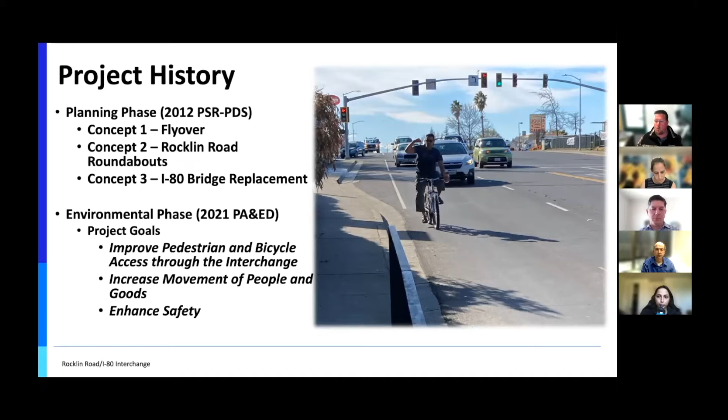And lastly, we want to enhance safety. As I briefly mentioned, for bicycle and pedestrians right now, your real only option is that small sidewalk on the south side of the interchange. With this project, we're looking at some alternatives to provide a safer bicycle and pedestrian facility through the area. And with that, I will turn it over to Luke to kind of go in on where we're at and what the designs look like.

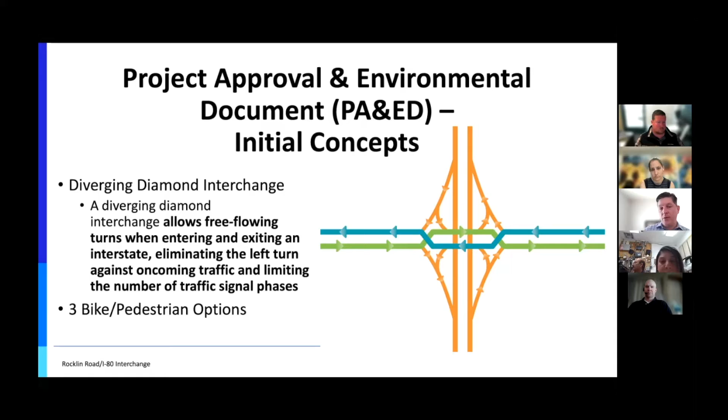Okay, thank you for that. And then you said we're still going to have 2 traffic lights. So I'm looking at this image and trying to figure out—maybe we can go to the next slide. Yeah, I'm just trying to figure out where the light still will be and how this will work. One more slide, actually. We'll come back to the video.

This is great, Sonia, this is what we wanted. So maybe one more slide, sorry. Can we go to the next one? Sorry, we've got quite a few things in here. A little preview—if we can go to alternative one, which I think is 2 more slides. Right here, there you go.

So we actually put a little traffic signal on here, Sonia, so it's easy to see. At the eastbound ramps, where the signal is today, we'll have another signal there—it's just that instead of people going through movements, they're crossing over. Same with the westbound ramps, we'll have a traffic signal there, and instead of going through, they cross over. You can see all the left and right turn movements are basically free, but in some cases they will be signal controlled.

And I can walk through this in more detail, Sonia. Are you good for that? I would love to see the details. I just want to make sure I'm understanding it properly.

Okay, so let's go back to the DDI video. Jacobs is actually working on a diverging diamond interchange in Alaska, and as part of that project they created an informational video. Now, this is a different interchange than we're proposing—it's just an example, and we're actually working on a video specific to Rocklin.

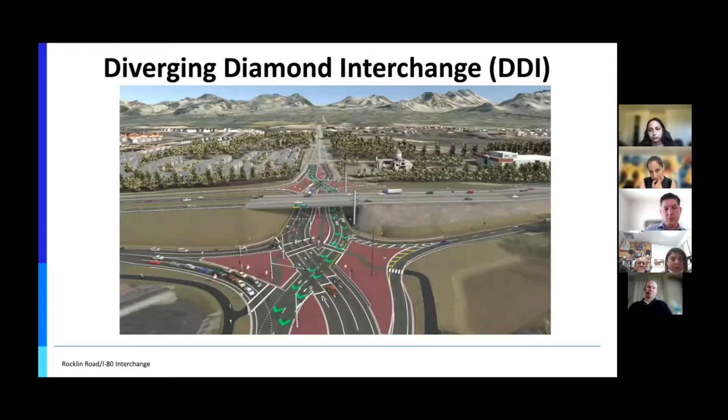Drivers report that DDIs are intuitive. Here's how they work. Drivers crossing the highway on O'Malley Road toward the mountains will go through a traffic signal, cross to the opposite side of the road under the bridge, and then cross back over again. Traffic traveling westbound on O'Malley Road toward Minnesota Drive will do the same. At the first signal, they cross to the opposite side of the road, go under the highway bridge, and cross back over again as they leave the DDI. Bicycles and pedestrians travel through the DDI in a protected central pathway. A major benefit of the DDI is that vehicles don't have to cross opposing traffic when entering or exiting the highway, which greatly reduces wait times at the interchange.

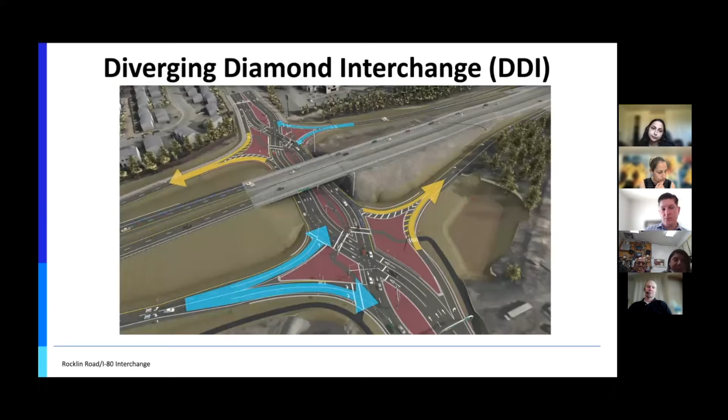So that's just a clip. It's a longer 5-minute video that talks about other interchanges, but that's just a 1-minute clip. You can see the roadway passes under the interstate, just like Rocklin Road does. What we plan to do is talk about the pedestrian and bicycle options specific to Rocklin Road, and we're working on creating a 1 or 2-minute video that we would show in April.

I don't know, Sonia or Roger or Ranveer, if that video helped you understand the DDI at all.

I understand the concept of it and how it's working. My question is, where are we putting those new lights and where is that crossing going to come on Rocklin Road, if that makes sense? Because I'm looking at my access for our business and I want to see where that's going to affect me.

Okay, Sonia, we're going to dive real deep. Mike's got about 6 slides that he's going to go through exactly how it affects your access. We're going to spend most of the meeting on 76 and the ARCO.

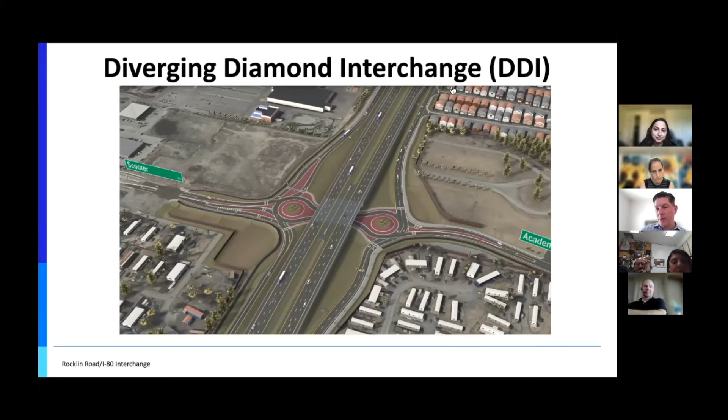Okay, so if we could go to the next slide. Ranveer, did that make sense? You're on mute. You're good? Okay, Roger, are you good?

Well, the only question I have is looking at this diamond construction, how much distance from the freeway the exits are. On this particular interchange at Rocklin, your businesses are almost right up against the freeway. My question is, how are you going to get the kind of spacing from the actual freeway interchange to be able to put in these exits and entrances? This looks like it would take almost twice the room that it looks like is there.

A good point, Roger. We're going to dive into that. We definitely are. The existing access at 76 and Arco is almost 0 feet from the off ramp to the on ramp in some cases, so that's what we're going to dive into. I hate to not answer your question right now, but if I could finish up my slides, then Mike's going to dive into this, and we have some specific exhibits. That's great. Thanks. Okay.

All right, let's get to the action, the main part of the show. So I'll get through these slides. I just wanted to say we really appreciate the stakeholders and the community. We had 46 people at the community meeting back on October 19th. At the stakeholder meeting, September 28th, of course, we had Sonia and Ranveer and Sierra Community College.

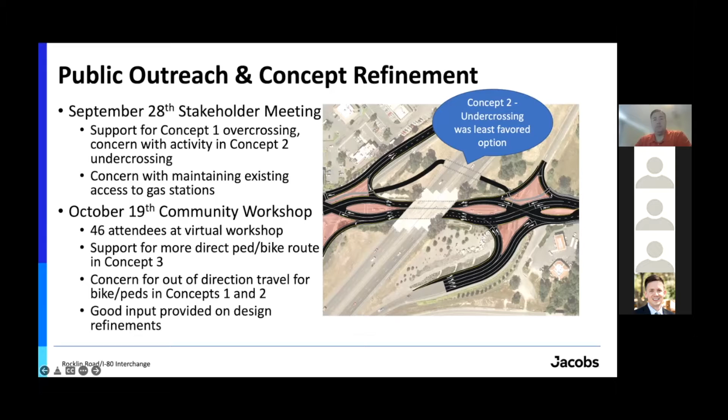One of our focuses is on improving access for pedestrians and bicyclists in this area. The Placer County Transportation Planning Agency, the regional planning agency for transportation, did a survey back in 2017 of both the Rocklin Road and the Sierra College interchanges. We got some pretty good feedback about the crossings here, and this is going to be great information for the city to go after state and federal grants to fund the interchange. You can see some of the issues pedestrians and bicyclists are having—they're basically avoiding this area.

As you know, the area to the west on I-80 is State Route 65, so you can't go west to cross I-80 because it's a freeway to freeway interchange. You'd basically need to go down to Roseville Parkway or Eureka to cross I-80, and that's a good 3 miles to the west. Then to the east you have Sierra Community College—as you all know, this is a newer interchange, but it's a very busy traffic area.

We actually think the Rocklin Road interchange may be the ideal spot for a regional connection across Interstate 80 for almost 4 miles, because even Horseshoe Bar Road, the next interchange up from Sierra College, isn't a great bicycle pedestrian crossing, even though the overcrossing was recently reconstructed. So we're focusing in on Rocklin Road as not only a connection between Sierra Community College and downtown Rocklin, but it would actually tie into the regional bike network, which is something Sierra Community College has expressed interest in.

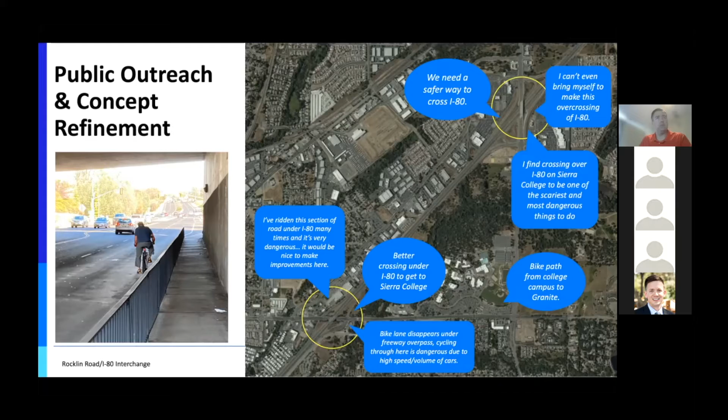We actually got some big data—we're tracking, if you don't know, you're being tracked by your cell phone. That's good and bad. It's bad for privacy, but it's good for transportation geeks like us who want to know where you're going to and from.

Hopefully you can read this graphic, but basically what we did is we did a screen line just west of Interstate 80 on Rocklin Road, so we could see where people are driving to and from. It's actually pretty interesting—this is all motorists along Rocklin Road. You can see folks that are going eastbound, towards Sierra Community College. They might be coming out of the 76 gas station and going to Sierra Community College, or coming from downtown, or coming off the ramp from the Auburn area. You can see almost 3,000 trips are traveling less than a mile.

I want to quantify this. If someone went to Starbucks and stopped there, walked in and got their coffee, stopped for 5 minutes, and maybe they're coming from Auburn but then got back in their car and drove to Sierra Community College, that would count as a trip. So we're not saying all these trips are only driving a mile—we're saying they're driving a mile between destinations. They might have gone to the cleaners or Arby's and stopped for 5 minutes and then kept going. But there are about 3,000 trips traveling less than a mile.

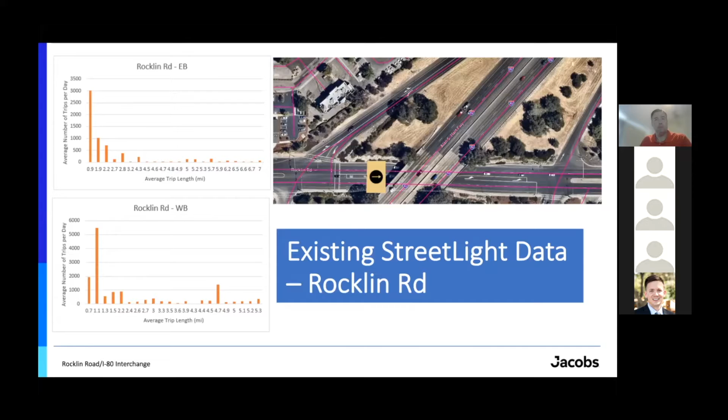Dave, I don't know if you wanted to add anything, if I missed anything.

Yeah, I think you covered it pretty well, Luke. I guess we do have the ability to get to that origin-destination type information and know where people are coming to and from on this corridor. What we're trying to show in that previous graph is just the likelihood that there are people that want to bike and walk in this corridor, but just don't now because of the conditions that are out there. So we have good indications that this is a good place to improve those type of facilities.

So Sonia, what we can do is drill into a specific property, and we've done that with Sierra Community College here. We've looked at who is coming from Sierra Community College, and we've included their parking lot on the south side. Again, this data is from 2019, so it's pre-COVID, when people were actually driving. If you look at the top graph, that's everyone going to the campus. It may be a little hard to see, but there's about 500 people driving to the campus, and it's less than 1.5 miles from their origin.

Now, that could have been someone coming from Roseville, stopped at AM/PM for 5 minutes, and then went to campus, and because they stopped for 5 minutes, it's counted as a trip from ARCO to the campus. But again, you can see there's about 500 people going to campus and 500 people leaving campus that are driving less than 1.5 miles between when they stop. So we feel like there's 1,000 people out of the 20,000 per day on Rocklin Road, some portion of those could be walking and biking.

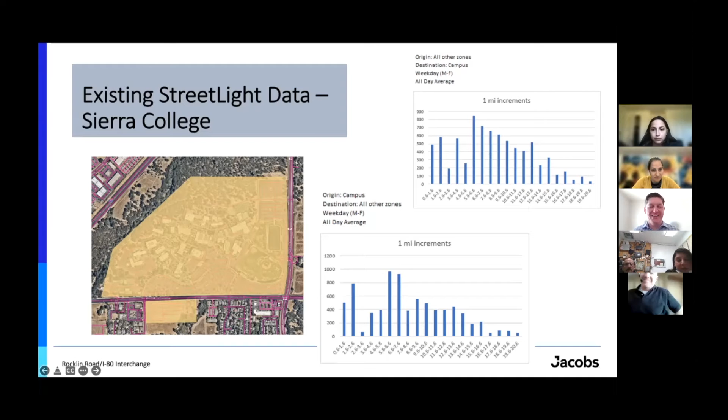Okay, so this is brand new. You haven't seen this. One of the things that we have an opportunity with the pedestrian bicycle overcrossing under alternative 1 that we don't have under alternative 2 is to brand it for the city, make it a gateway, make it an entry point for the city.

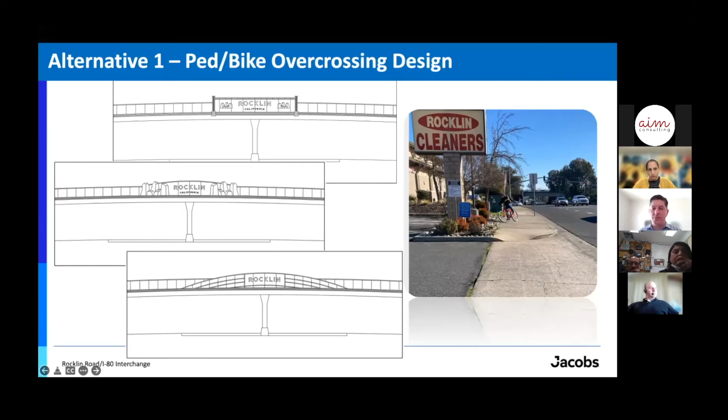I'm looking at this and I'm looking at where would that overpass exactly be? Where would that, I'm just trying to picture it. We could go back 2 slides.

So you see where the gray is just above Rocklin Road? That's the overcrossing. But we're still looking at changing the lanes with that overpass. So would this be an additional item to it, or are we eliminating that middle access for the pedestrians? Is this like the alternative? I'm trying to visualize. Sonia, I can tell I've totally confused everyone by showing that video.

Pedestrian and bicyclists will not be walking down the median. That was just an example from a different area. Pedestrian and bicyclists under alternative 1 are all going to be at Aguilar. They would cross to the north side of Rocklin Road, come along the sidewalk, cross at the at-grade crossings at the westbound ramps, and then follow that black line, that trail, up to the gray. And the gray is a structure, so the structure would go up and over.

And I don't know if someone has a laser pointer. I understand what you're saying now.

I'm looking at it. The only thing for me is that eliminates, I'm on the other side. My business is right here. So doing this project eliminates a lot for us, if that makes sense to you, but it's not coherent for us because we're losing all that traffic all the way to the opposite side, and they're going to be going elsewhere, so I'm going to miss out. So even if we're doing this, I'm just thinking about the businesses in the area, and the way this is constructed, it doesn't really work for us.

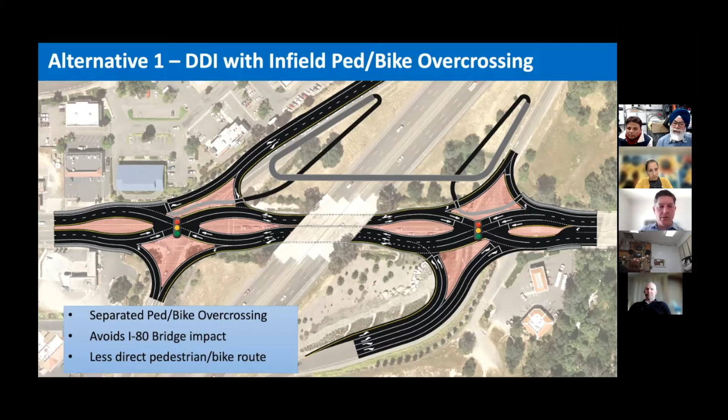Let's go to alternative 2. If we could advance the slides, then I think it'd be easier to explain. So alternative 2—and sorry, I didn't catch your name at the start.

He's Gurmeet Garewal from... Gurmeet, am I saying it right? Yes. Gurmeet, thank you for that comment. So we have 2 things going on here, Gurmeet.

One is most of the traffic at this interchange is coming off Interstate 80 off the eastbound off-ramps. It's a really high traffic movement, and in the future, both the left and the right. We have most of the traffic getting onto I-80 westbound going towards Roseville. Yes, there's traffic going towards Auburn and Tahoe, but most of the traffic is coming from San Francisco, Sacramento, Roseville, Rocklin—well, I should say Roseville, Lincoln area.

And so there's a lot of pedestrian and bicycle conflicts on the south side where we're actually seeing some fatalities. There was one fatality just west of the interchange. Bicyclists are using the sidewalk instead of the roadway, and so they're hitting pedestrians. We're seeing accidents with pedestrians, bicyclists, and cars because of the current configuration.

By moving the sidewalk to the north side of Rocklin Road, we really eliminate a lot of the conflict points, and there's just less traffic getting on the ramps on the north side. So that's one reason we want to move the sidewalk to the north side—to reduce the conflicts between pedestrians, bicyclists, and vehicles.

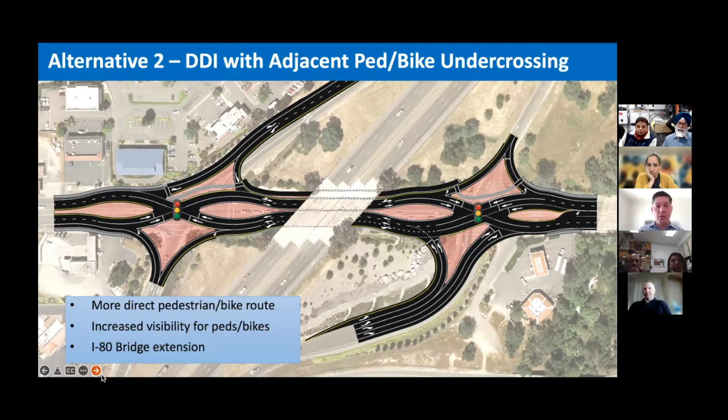Yes. So just real quickly, alternative 2 - I think I've talked about it, but I did want to point out that there's increased visibility for pedestrians and bicyclists with that more direct route. And with that, I'll turn it over to Dave Stanek.

All right, just briefly, I'll talk about the traffic analysis we've been working on. We've talked a lot about what's going on directly at Rocklin and I-80, but our study area does include all the way up to Sierra College, the main entrance at El Don Drive. We're also studying the interchange at Sierra College Boulevard and I-80, because once we make changes at Rocklin Road, we'll see traffic shift from Sierra College. We're also looking along I-80 itself to make sure what effect the new project will have on the freeway, so we can account for that change for people driving past.

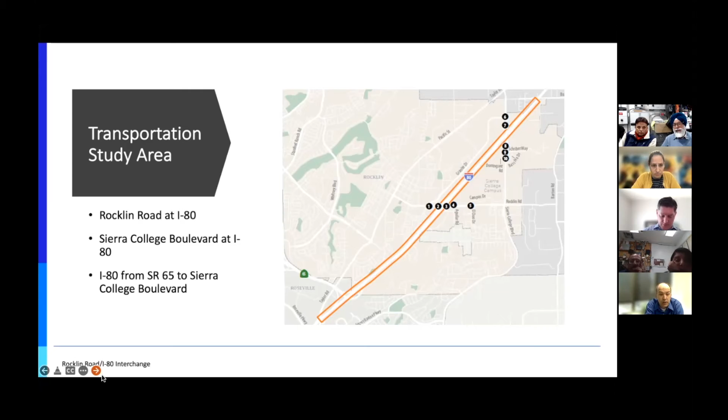Next slide. So this is our analysis model. We can go ahead and get it started running. This is showing the PM peak hour, using traffic volumes that were collected back in 2018.

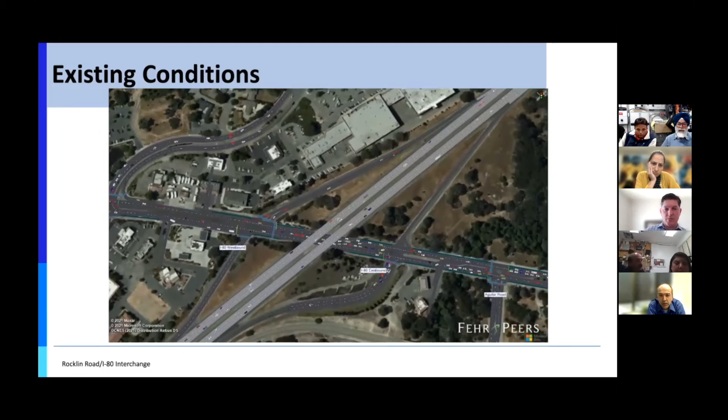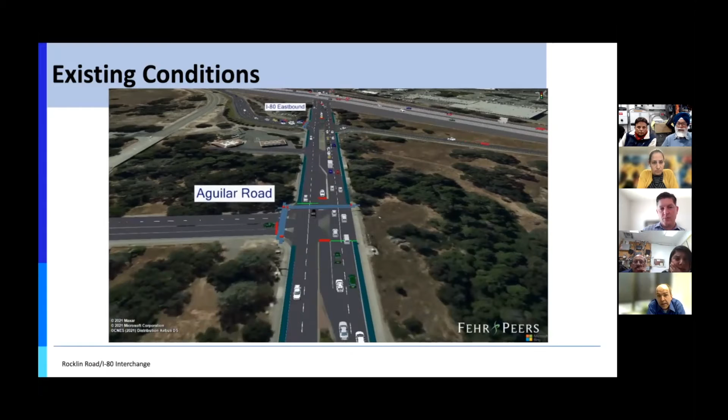I'm showing the PM, so you'll see the westbound direction backing up with all the traffic coming from Sierra College off to the right, trying to head to westbound 80. We're using the same simulation model to evaluate future conditions as well. Under existing conditions in the AM, it's really all that traffic trying to get off eastbound 80 and heading to the college - that is a concern.

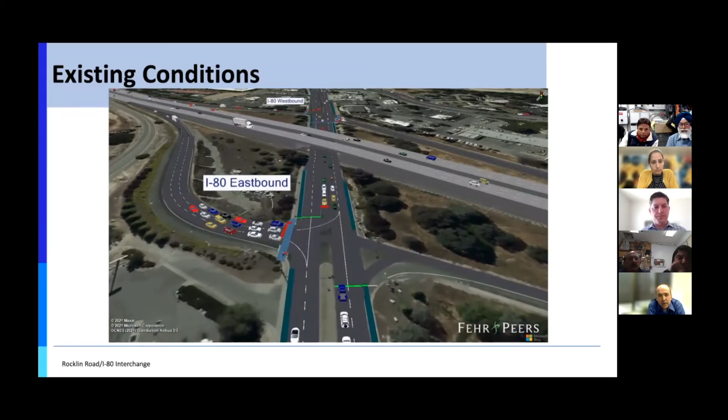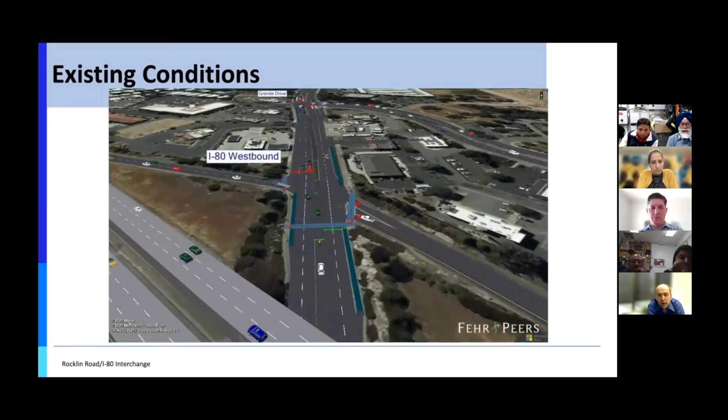And then here in the PM, again, the issue is really that westbound traffic coming along Rocklin, trying to squeeze into that one lane pocket and having to go through both signals - you can see the traffic's backed all the way up - as well as the one on the other side of the freeway, trying to get all that traffic through that one lane, all the vehicles wanting to head back to Sacramento and Roseville in the evening, again a lot of it associated with the college.

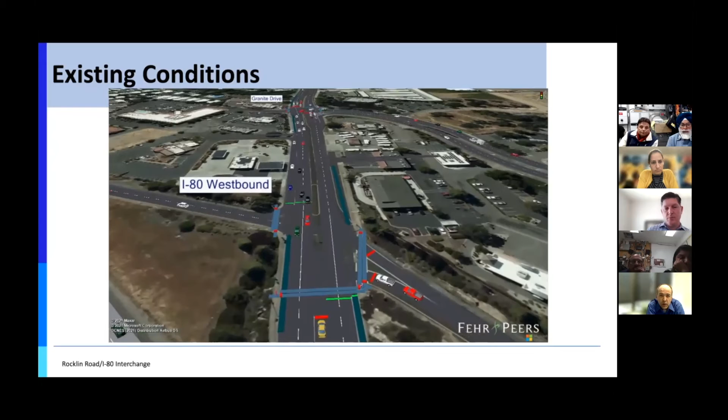And then as we continue on in the video, you can see we get over to the Granite Drive intersection. All right, so go on to the next slide.

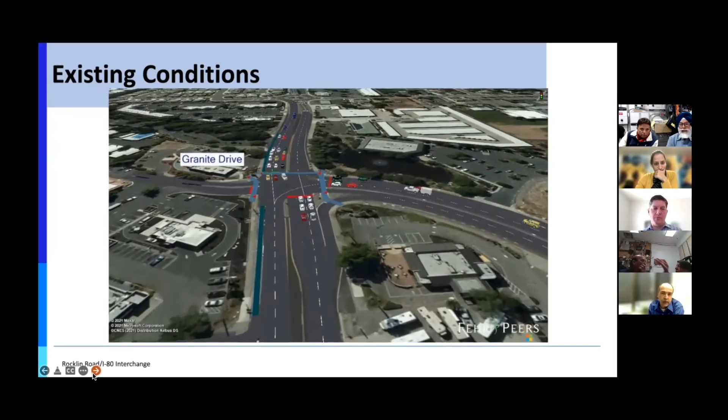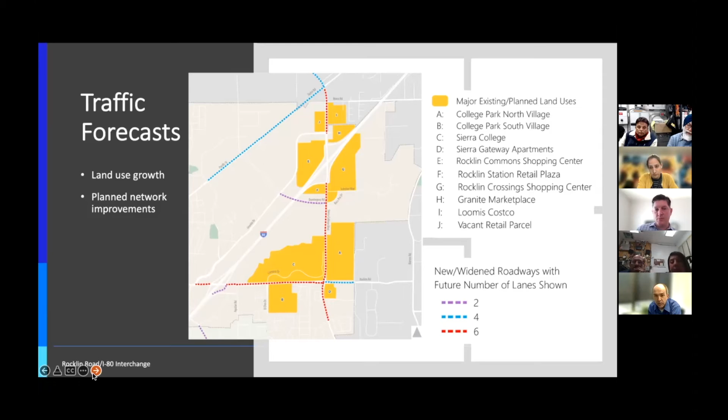And then finally, the roadways as well will be improved. You can see there are planned future widenings of Rocklin Road and Sierra College to 6 lanes, as well as a planned new overcrossing at Dominguez Road to help with circulation within the city itself.

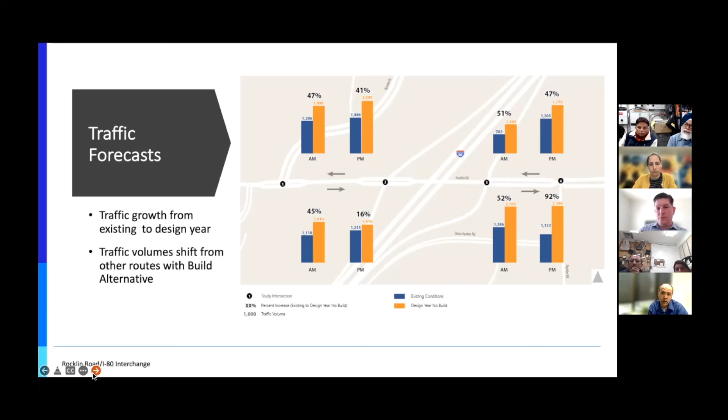And then this is the no-build growth. Once we do put in the improvements, we see some increase of about 100 to 200 vehicles in some movements, as people shift from going the longer route via Sierra College Boulevard to taking the shorter, more direct route on Rocklin Road to Sierra College and other destinations. And then finally, we have some preliminary results from our future model.

Without any improvements, under the no-build alternative with the existing configuration, we'd expect travel times in the area to increase quite a bit. Currently, heading westbound in the evening, it's about 2 minutes to get from the college to westbound I-80, but that could increase to as much as 10 minutes or more without improvements.

With the planned improvements, like the diverging diamond interchange you saw before, that travel time would go back down to about 2 minutes. Similarly, heading eastbound away from the freeway toward Sierra College, today it might take 2 minutes, but that could be as much as 15 or 16 minutes in the future. With the improvements, we can get that down to less than 3 minutes.

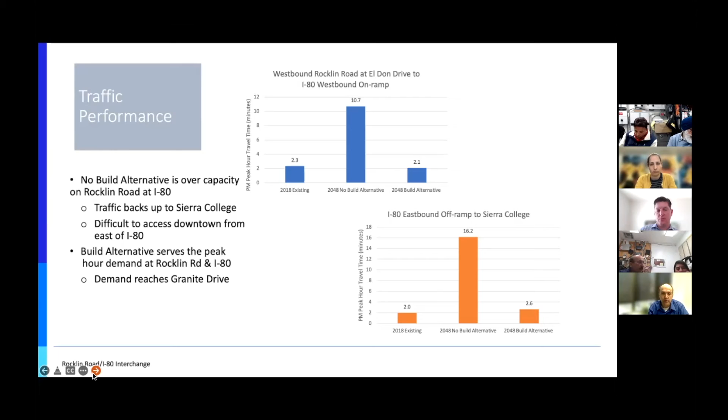So again, we're seeing that the planned diverging diamond really provides that connection. It makes I-80 less of a barrier between the east and west sides of the city of Rocklin. Next slide.

I think this goes over to Mike. As Matt mentioned at the beginning of our meeting, we are in what Caltrans calls the PAED phase, which is really just a fancy term for preliminary engineering. So all the slides and pictures you've seen so far in this presentation were some of our initial concepts, but what we've been working on since last fall is actually the preliminary engineering of this, getting into the specifics.

I believe it was mid last week we made our first submittal to Caltrans for what we're calling the geometric approval drawings, which is the actual layout of what would be constructed here, what we're proposing. So these next couple slides I'll go through and get into the specifics. Please feel free to stop me if there's anything you want to talk about when we see it.

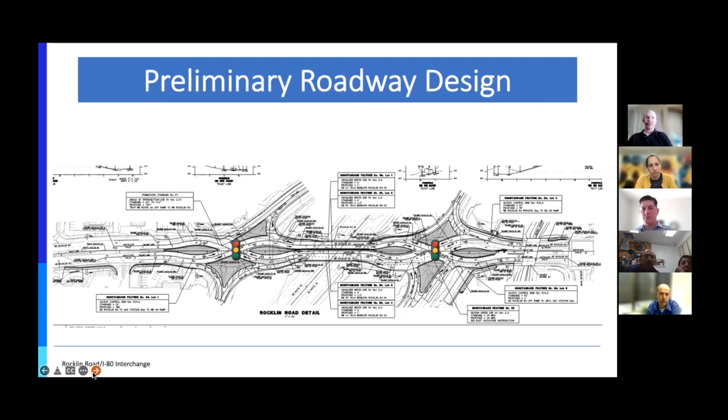We'll start here with the westbound off ramp and the changes we're going to be making. One of the bigger changes on the project is we're going to be shifting the off ramp a little closer, right up on the right-of-way line, where you can see the KFC and A&W, and there's going to be a retaining wall basically along the shoulder of the ramp. The reasoning we're shifting this over is to add some curvature and help slow traffic down as they approach the interchange, and also to help line up with the location of the crossover intersection.

So there aren't any impacts here to any of the businesses. The type of wall will likely require a temporary construction easement in this area, but permanently there won't be any impacts.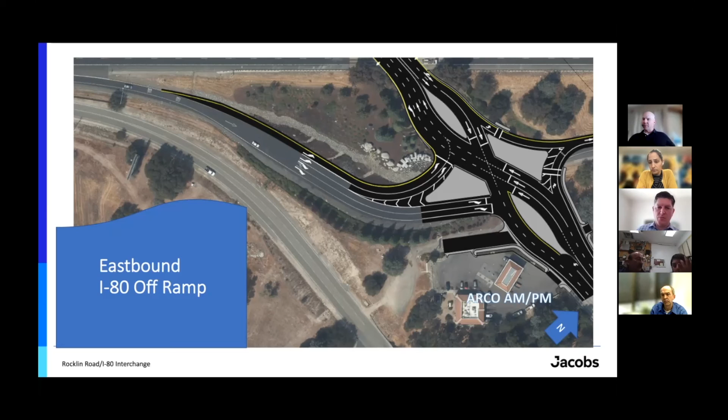Let's go to the next slide, it'll show this better. Some revisions we've made with this intersection, the crossover intersection—this would be the east crossover intersection. We've slid it a little to the west since our initial concepts, to maintain access to that driveway, which I'd call the western driveway to the ARCO AM/PM. That access is the old frontage road that used to come through there before the interchange was reconfigured in the mid-90s. So essentially we're maintaining those existing traffic movements. That's really the biggest change on this side, the east side, since you guys saw the initial concepts.

Oh, Luke, go ahead, jump in. Maybe we can go back. So Sonia, and actually Ranveer, I want to go back to your property too, but Sonia, I'll start with you. So you see the driveway on the north side of Rocklin Road that goes into the vacant property? Yes. Okay, so that's just a private driveway, there's just a fence there with a mailbox. It's not heavily used, I'm sure the property owner accesses it occasionally. Caltrans has let us know that we need to shift that driveway further to the east towards Aguilar. Okay, so we probably will shift that driveway towards Secret Ravine more.

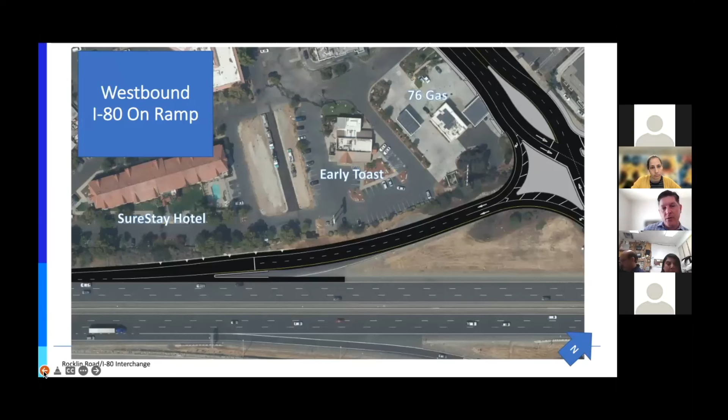If we could go back just 2 slides to the other side, one more. Ranveer, we came out and met on the site. We presented 3 options. I appreciate Arby's being here also because you can see you're slightly being impacted. We don't think we'll impact your drive-through at Arby's. I think we'll move that existing retaining wall back further, but it will be getting into your property. So I'm not sure if you have any comments related to this or any concerns.

Yeah, I think we're gonna be okay. How many feet are you gonna be coming towards the drive-through? We don't have that detail yet. We're still working, we need to get comments back from the city and Caltrans, but at the next stakeholder meeting I'm going to talk about next steps. We'll have another stakeholder meeting in the fall, we'll have those details. As long as it doesn't impact my drive-through, I think we'll be okay. Okay, thank you, appreciate it. Thanks for being at this meeting, by the way.

Ranveer, I'm going to deliver the same bad news to you. You have 3 driveways. One is right where you see Jack in the Box on Rocklin Road. You have the second one at 76, on one side of your gas pumps. And then you have a third driveway closest to I-80. That third driveway is actually less than 0 feet, it's negative feet because it's actually in the ramp. So we need to talk more about that third driveway and how you're thinking about reconstructing your site.

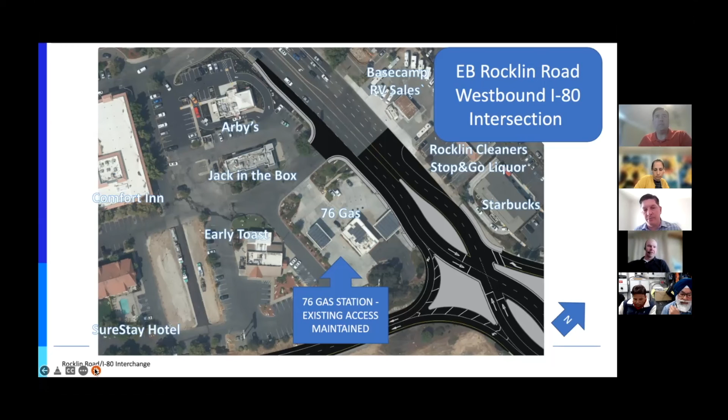Okay, Mike, back to you. Sure, I think I only had one more slide. If you want to jump forward, yeah, this next one.

This is just, there's no impact really here to any of the stakeholders, but it does show that we are realigning this eastbound 80 on-ramp. The reason for this shift was we were trying to avoid the property impacts here, this private property on the corner. We needed to relocate the ramp a little bit just to make the vertical grade work easier through here. But as you can see, it's a pretty minor shift, not too much change, and it is minimizing the impacts to the private property.

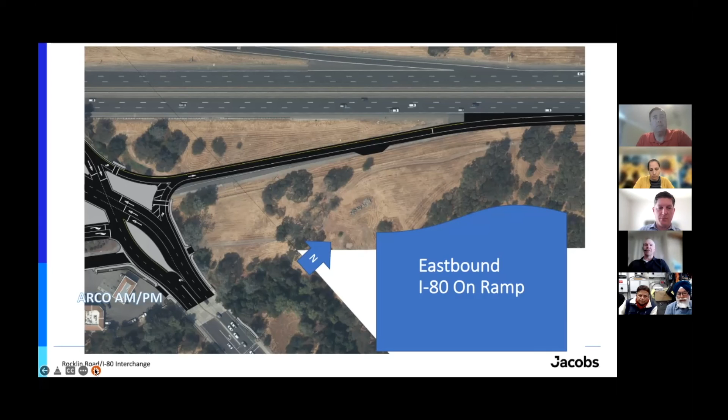That's really the summary I have of where the design currently is. So please, if there's any other questions, feel free to chime in. Otherwise, I'm going to turn it over to Ashley here, and she's going to talk about some of the environmental technical studies that have been happening on the project.

Sure, thanks Mike. So another aspect besides preliminary engineering, we're also working on the environmental document. There are numerous environmental technical studies in the works right now, in progress, leading towards the final overall environmental document. These are just some of the studies we're currently working on. There have been no red flags so far with our environmental team as they're out there doing these studies. It's just the process we have to go through, doing the due diligence for the project, checking everything from noise to air quality, visual resources that includes any loss of trees or disruption to the landscape areas, which we can mitigate with the project.

Hazardous materials would be if there's any known or potential contaminants out there or from construction. Review of the biological resources.

That's focused on the trees, the nesting birds, and impacts to existing resources out there. Cultural resources include tribal consultation with the Native American tribes. And the CEQA and NEPA process is an overall summary of the technical work and a requirement for the environmental document.